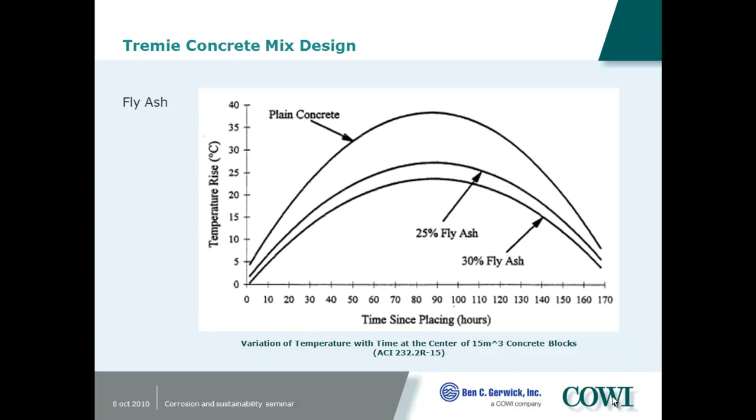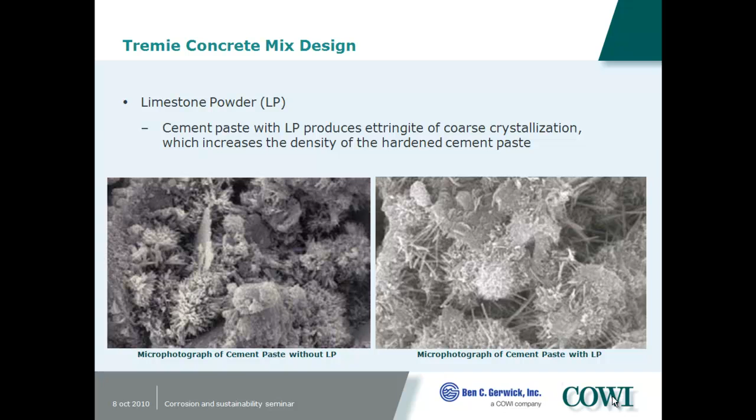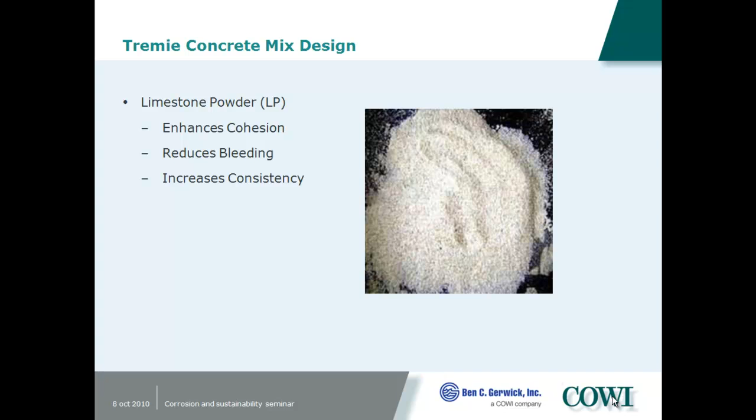It also decreases permeability, so it increased the cohesion, it reduced our bleeding, and it made our consistency very good for the Tremie concrete.

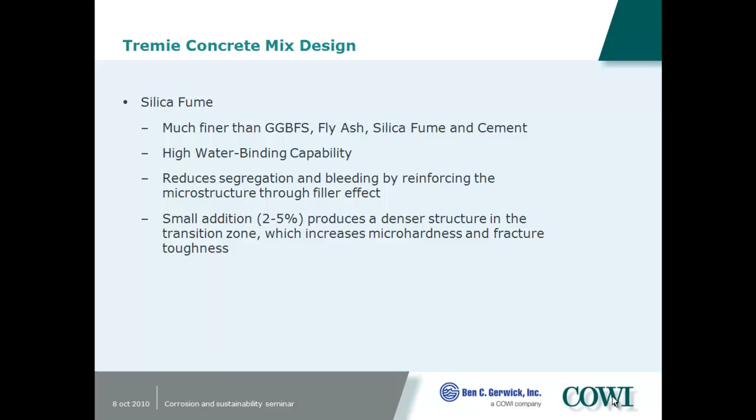Microsilica fume is much finer than all the other particles, so it can promote many sites of nucleation for the hydration product to grow, which winds up with a finer microstructure. It has a nice water binding capability. It can reduce the segregation and bleeding, and small additions produce denser concrete with a better bond to the aggregate.

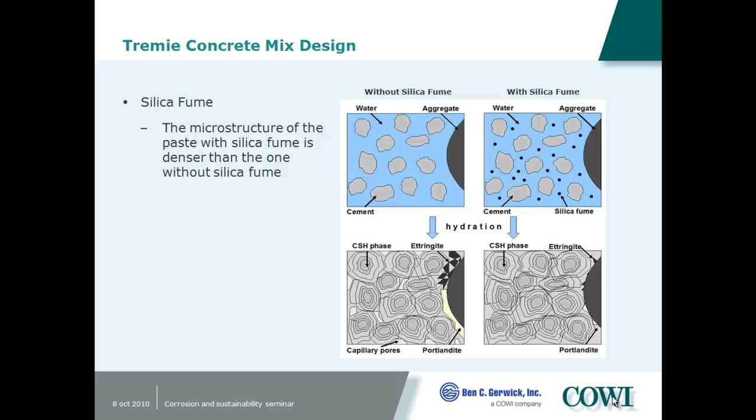It can decrease some of the calcium hydroxide that can be a weaker product. So this just gives you an idea that it gives you a lot more nucleation sites, so it can be a finer type of cement paste structure. It gives you better strengths and better permeability values.

So this is chemical admixtures. We're fortunate that we have high-range water reducers these days, but we think it is valuable to blend them with a low-range water reducer. It can extend the slump life, and it can be more economical that way.

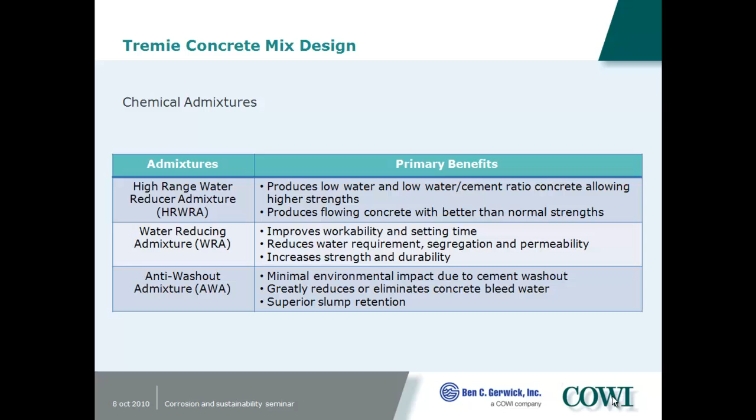And using the anti-washout admixture, as I said, it can improve the strength of the concrete, get rid of the bleed water effect. And here for the Tremie concrete, it allowed us to have higher workability and still achieve consolidation underwater.

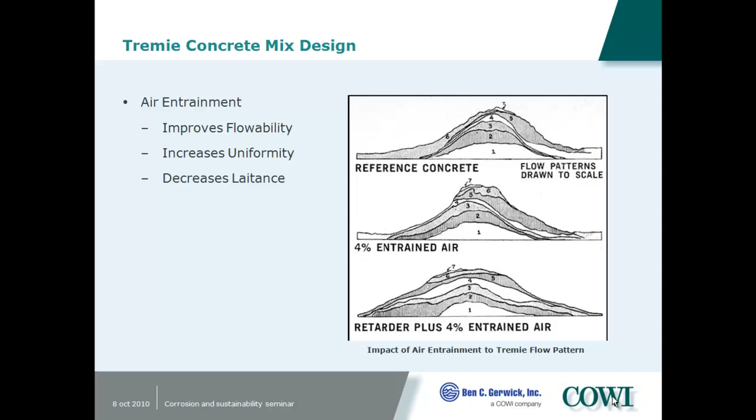So here's air entrainment. We did have, I think, up to 6 to 8% air entrainment here. As you put in air entrainment, you can take water out, and still maintain the same workability, so it can be cost effective in that regard. Even though we don't have much of a freeze-thaw problem under the river, it still can improve workability.

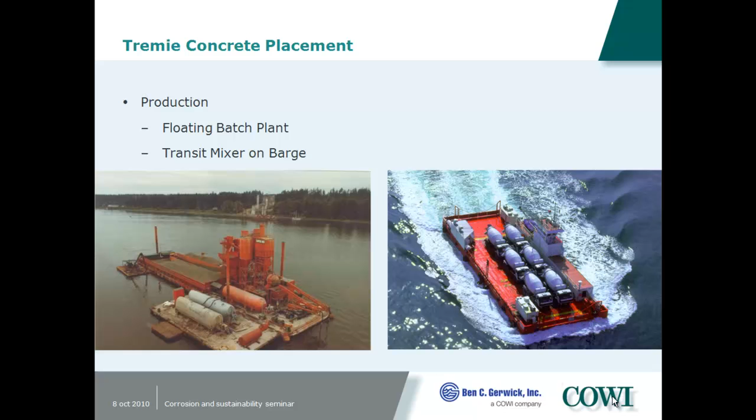You can see it can actually produce a little bit better flow patterns. These are just different ways of getting the concrete to the site. You can either have a floating batch plant or take it by a transit mixer, or in this case they're actually pumping it through a pump line to an agitator and then placing it down the line.

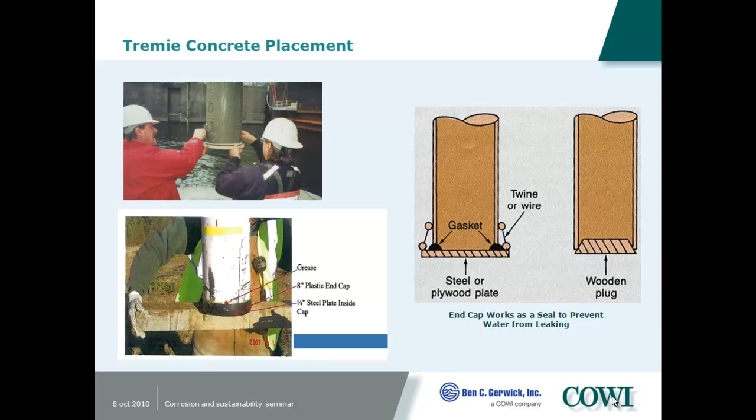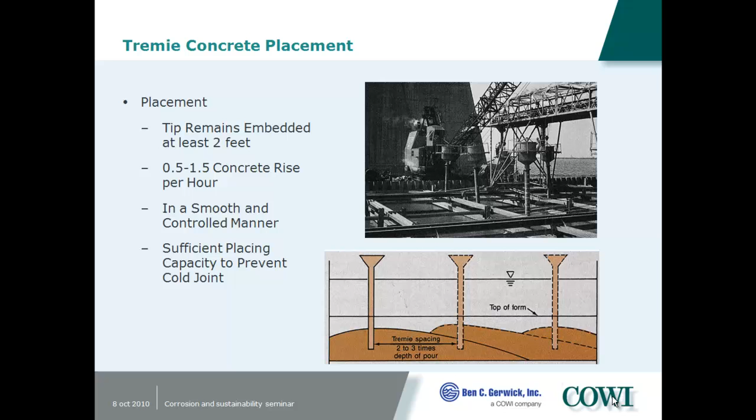You have to start off the placement with different ways of sealing the Tremie pipe, either with a cap or a plate, or you can also use a pig, but here we're using a plate on the end with tie wire. So this just shows it getting started. You need to seal it there in the bottom to stop it from mixing with the concrete, so you always keep the end of the pipe buried.

As I said, it builds up and then flows out. If you have laitance, you want it to move all in one area so that you can remove it after the placement.

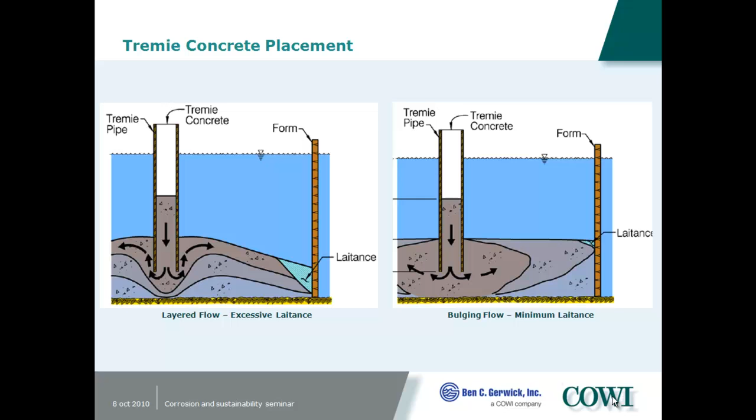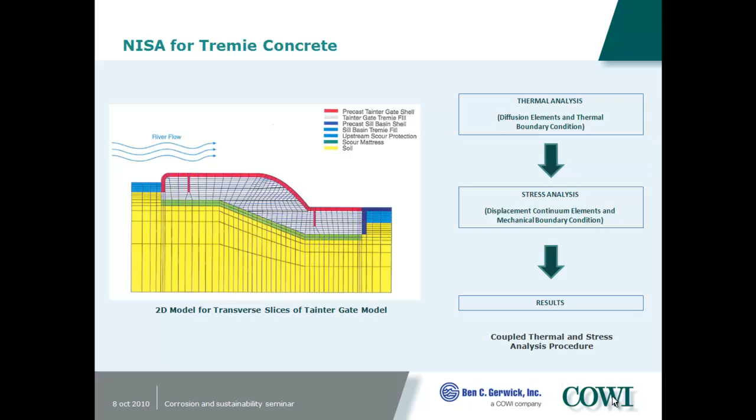It's important to control the thermal stresses, so we did a non-linear incremental structural analysis. All the properties of concrete are non-linear at early age, and so we have to vary the stiffness of the concrete, the Young's modulus, as the strength is changing, the tensile strength is changing, and the heat generation patterns go into the analysis on the computer.

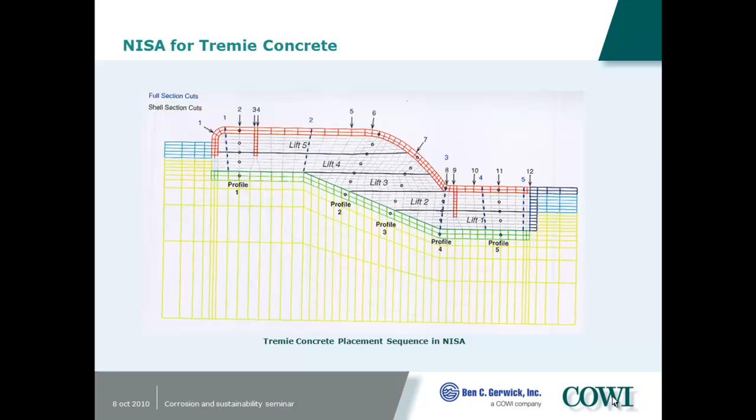We have to match the sequence of construction with the different lifts going in at different times, and simulate the ambient temperature from the river water during the summer and the winter to match our placement plan. They're placing now in the fall.

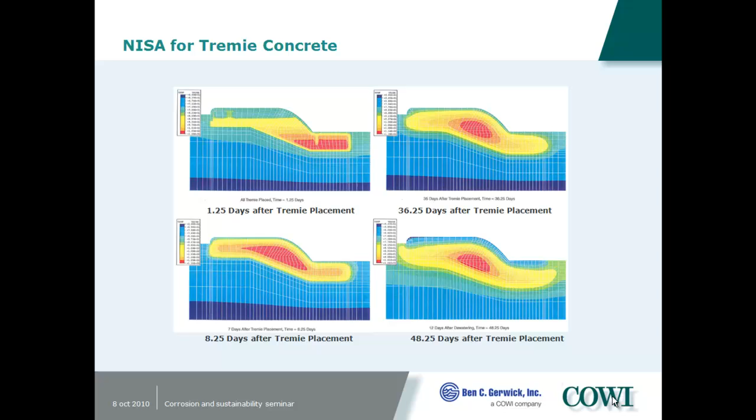You can see it normally cools around the perimeter while it's still heating and expanding on the inside. So it expands on the inside, then it creeps, and then when it cools, it pulls back in and puts the outside into tension. So once you get these temperature patterns, you have to do a strain and stress analysis.

Once you get the strains and stresses, you can produce predictions about cracking. So you monitor the change in the tensile strength of the concrete with age, and fortunately we have a shell that has a relatively high tensile strength because it's precast, prefabricated, and highly reinforced.

As you would expect, the crack potential is highest right where there's a reentrant corner, a stress concentration, and this just shows that it's just under the crack criteria there, 99% of the crack criteria.

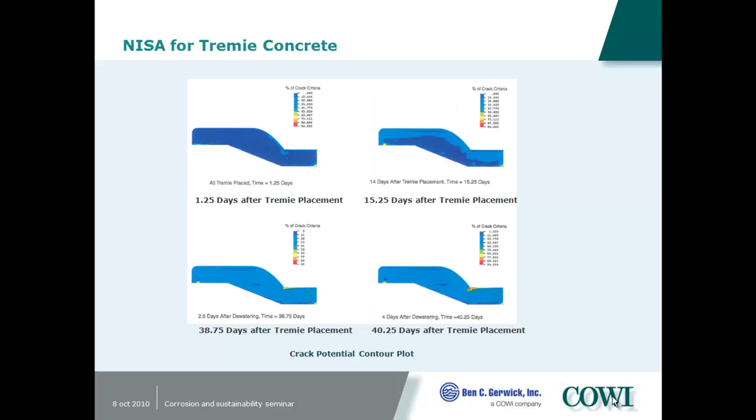But even if it does crack, most people assume concrete is cracked—that's why there's reinforcing across it. But the Army Corps wanted us to try to characterize the widths of the cracks and what they'd be opening or closing if they did form, and how fine they'd be. So we did do that analysis.

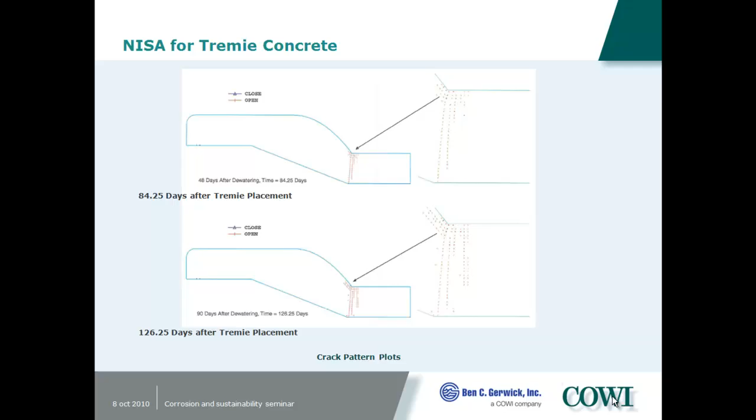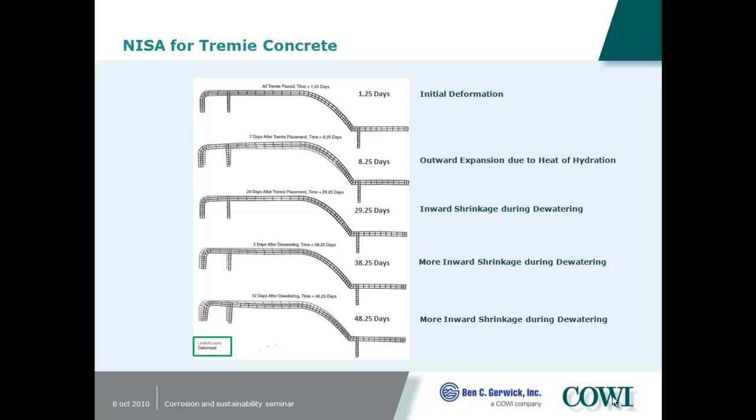They also wanted to see the deformed shape of the shell as it was expanding and contracting with time, including the shrinkage—the natural shrinkage that was going on too. So it's not just thermal, it's also, as concrete hydrates, there's a chemical shrinkage. Of course, since it's underwater, there's no drying shrinkage going on.

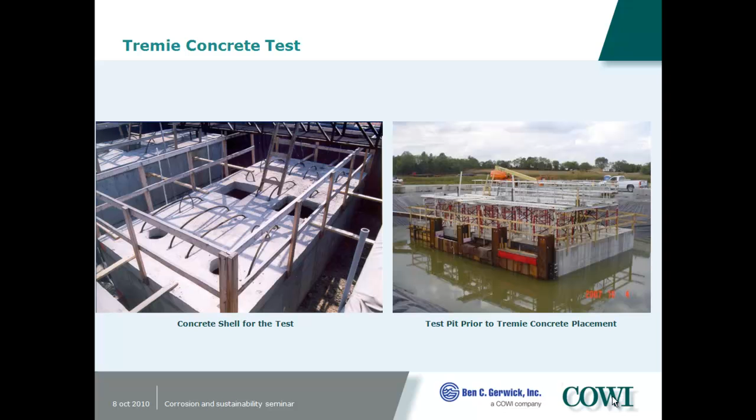They had two full-scale Tremie mock-up placements. So this is after the shell's been stripped, and this is showing the concrete being placed. You can see the outline of the shell.

In those particular shells, it had beams in it, and the concrete went all around the beams and filled in, and there was a good bond.

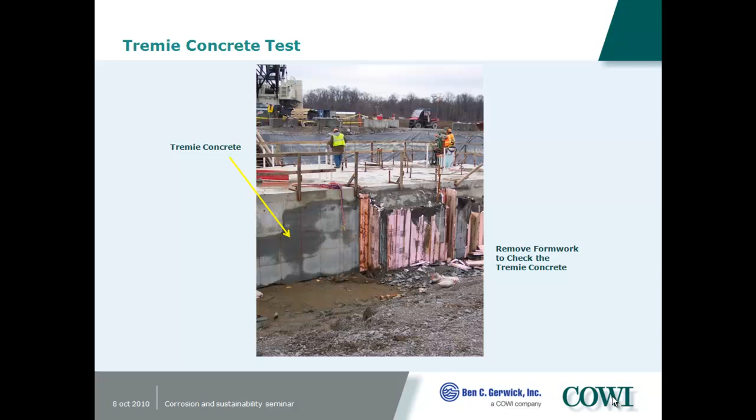They took cores through the shell and through the concrete, and there was good adhesion between the shell and the reinforced Tremie concrete. So you can see after they removed all of the forms that matched the beams, all the concrete in here was perfectly matching the surface of the underside of the shell, with very little bleeding in this case.

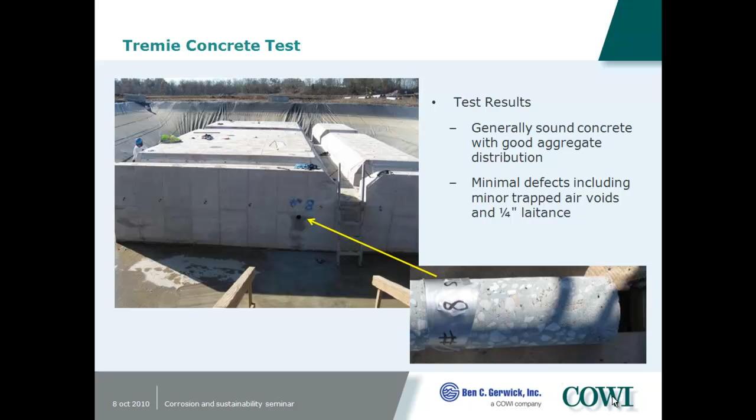This shows some of the overflow. Inside of the shell, we required the contractor to put in more Tremie concrete than the volume required, so some of the laitance would flow out the top.

In this test, after it flowed out, it wasn't contained and it mixed with the water, so there was more laitance there than what was really the case in the river. In the river, it flows into the legs of the lifting frame so that it doesn't mix with the water and affect the environment.

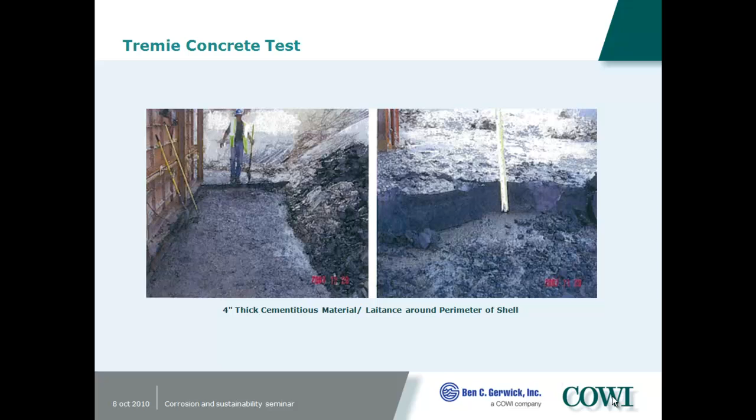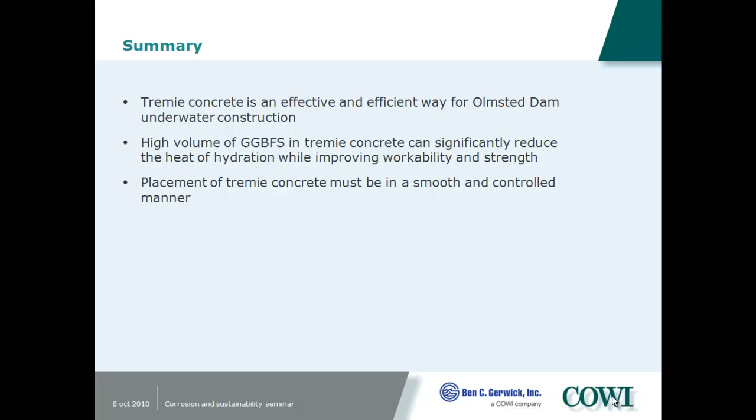So Tremie concrete is an effective, efficient way for the Olmsted Dam to be built underwater. We've had high volumes of granulated blast furnace slag to reduce the heat and improve the workability, and as I said, it's been demonstrated to be quite effective in practice.

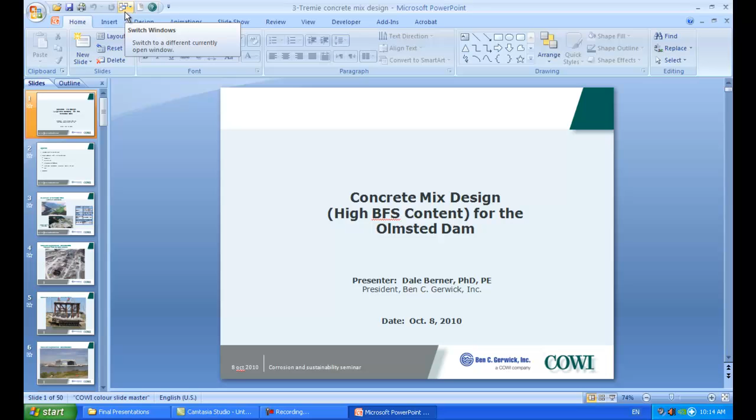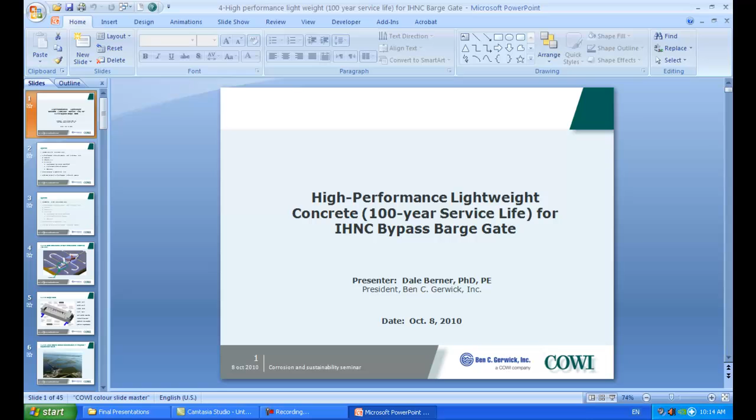It's due to the rate of funding—they're not building it as fast as I might have thought would be optimal, but they only do so many shells a year, and then they start over again when the funding stream starts. That's why there aren't more shells installed quite yet.

Now this is another Army Corps project. Instead of being the top priority civil project, this is the largest design-build civil works project for the Corps. It's the Inner Harbor Navigation Canal, the IHNC, Hurricane Storm Surge Barrier, and I'm just focusing on one part of it. There were 3 navigation gates, and this floating concrete barge gate uses high-performance lightweight concrete.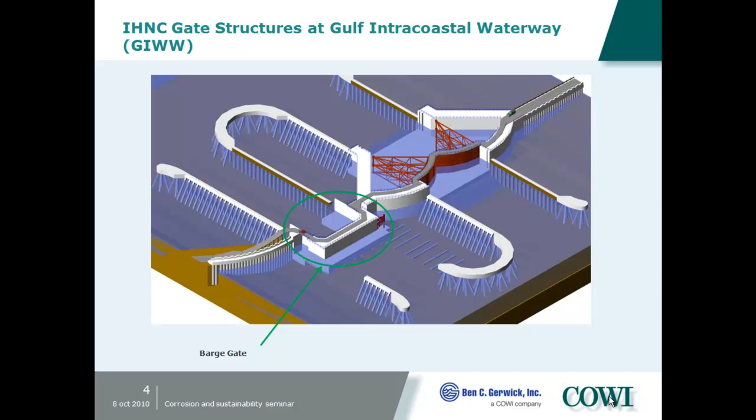In this gate, the navigable pass on the GIWW was 150 feet, so the barge gate was 190 foot, so it could bear up against the abutments and take a 22-foot head of storm surge that comes in with the hurricane, plus the waves build up on top of that another 7 feet.

You can see the base width here is 62.5 foot. The height is 43 feet because you have to go down below water level - the bottom of the sill here is at minus 17 feet. I think the bottom of the sill, above that there's a ledge that it bears against at minus 16 feet.

For a variety of reasons associated with the changing of the criteria from it being temporary to being permanent, weight became critical. So we went with lightweight, high-performance lightweight concrete, which has the benefit of also having very good durability because it has very low permeability.

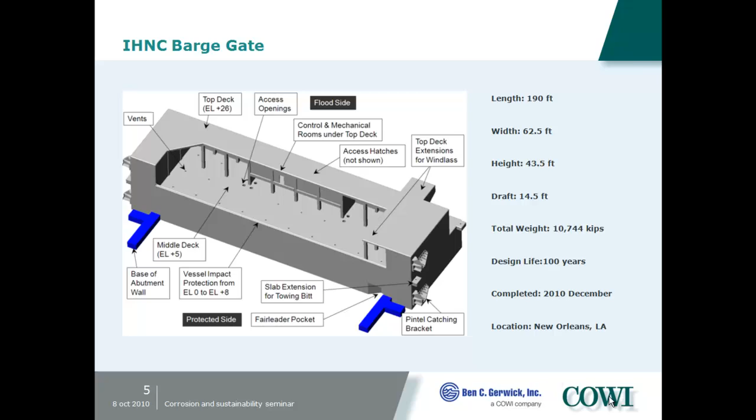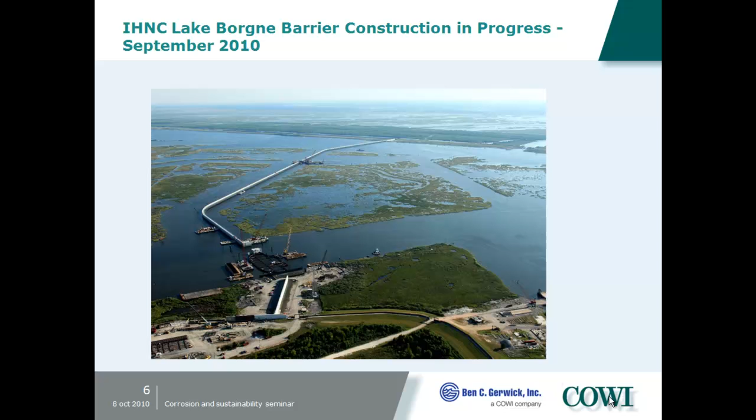This is the Mississippi River Gulf Outlet that was decommissioned. Here's one navigable gate, the Bayou Bienvenu. And here are two gates - these are the abutments where the barge gate will go, the bypass gate, and this is a 2-mile-long batter pile flood wall that we were the lead designers on.

This is the cofferdam from September, just last month, for the barge gate, and this is the traffic that goes through this pass at the moment.

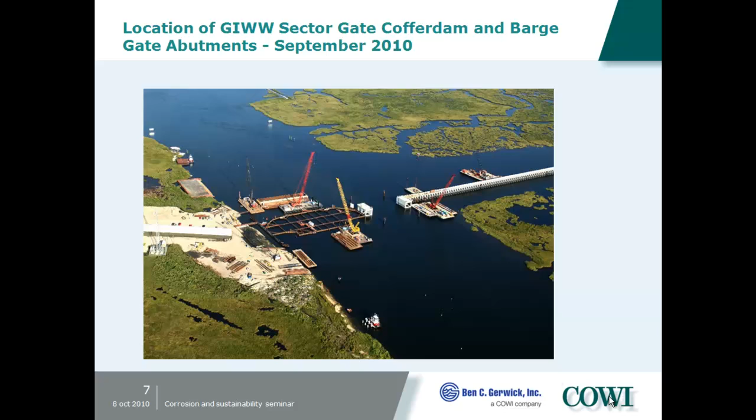And they're building the barge gate in a floating steel dry dock in Sulphur, Louisiana, several hundred miles away. It was an existing dry dock that the contractor got, and he thought that would be a good way to launch the barge gate out of it.

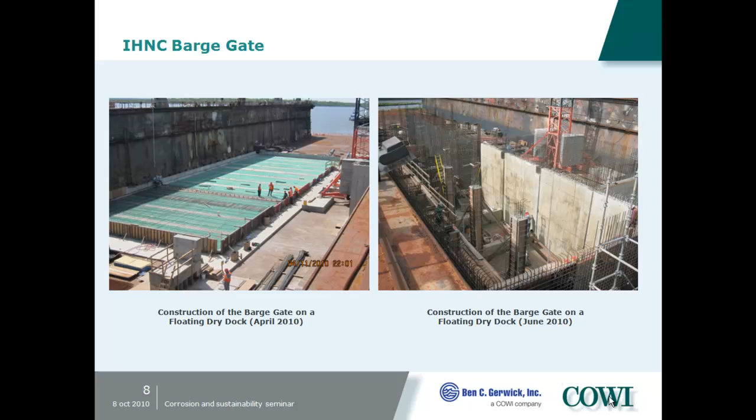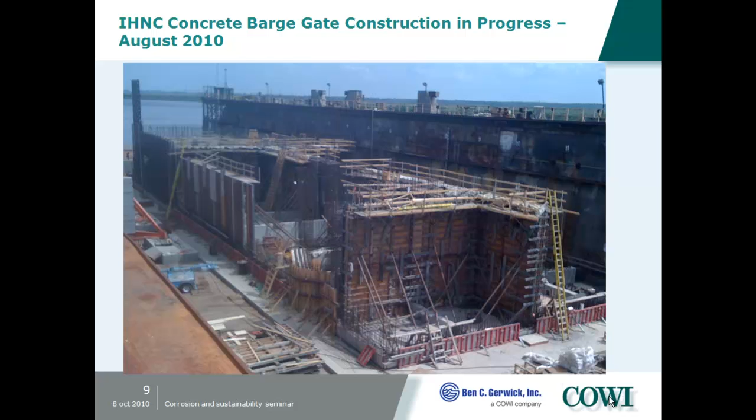So here it is, 190 foot, 62.5 foot wide. That's the keel slab. In April, here's in June 2010, with the lower portion - there's 3 levels of decks. There's the keel slab, the bottom level, this is the mid-level, and then there's the driving surface up above. So you can see this is as of August - I believe they're about two-thirds of the way through this mid-deck.